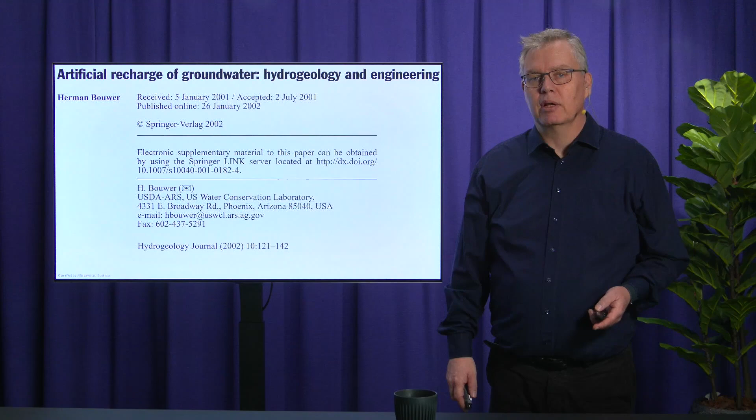My name is Alan, and in this video I would like to present a summary of the article Artificial Recharge of Groundwater, Hydrogeology and Engineering by Dutch scientist Herman Bouwer.

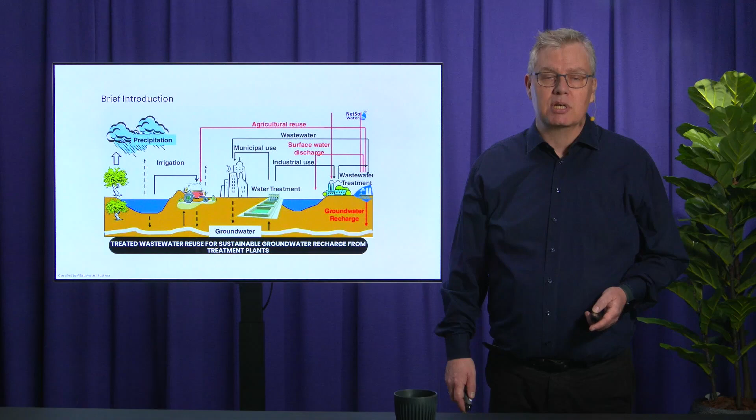Artificial recharge of groundwater means that we divert various sources of water to be stored in the ground. We may also assist the infiltration of water to reach the aquifer. Depending on local geology, we can use three types of recharge systems. Surface infiltration through typically large land areas.

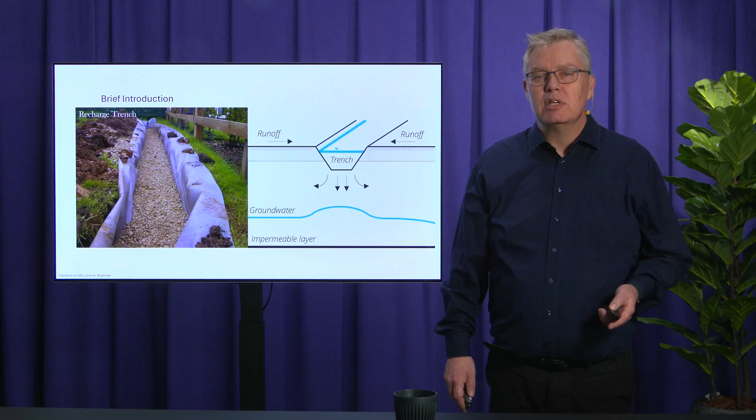Vadose zone infiltration through ditches or canals, which is a way of increasing infiltration surface area using less land area. These have a tendency to clog. And infiltration wells, also called injection wells. These are typically used where surface infiltration is low or there's a lack of available land surface. It may also be that aquifers are deep or confined.

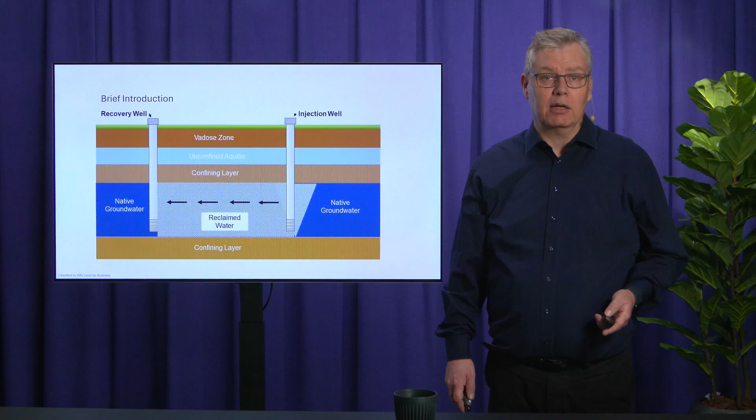Climate change increases the probability of extremes in weather, such as more frequent droughts and excessive rain. This means that artificial recharge is increasingly important because we can store water in periods of abundance for use in periods of scarcity.

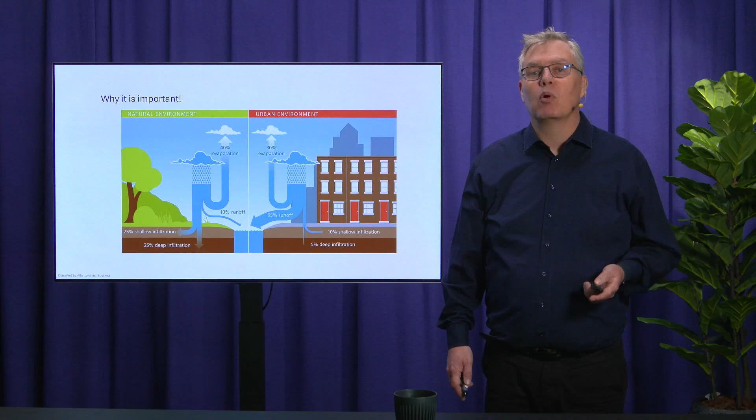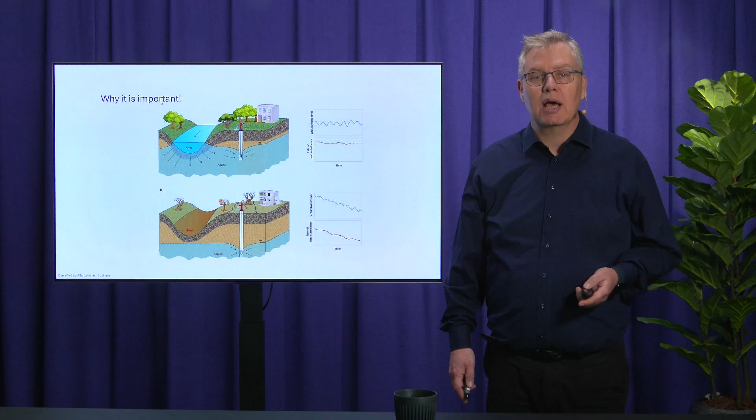Depending on local climate, specifically the amount of precipitation and evapotranspiration, urbanization may be seen as preventing water from reaching the ground or as a collector of water that can be diverted to artificial recharge. Other objectives of artificial recharge are to reduce seawater intrusion and land subsidence due to declining groundwater levels.

The traditional way of storing water has been with dams. However, good dam sites are becoming scarce. In addition, dams have various disadvantages such as evaporation losses, disturbing of waterways and wildlife, and increased risk of malaria and other diseases, none of which are an issue with underground recharge that has no open surface. Another obvious advantage is the volume that can be stored without taking up space above ground.

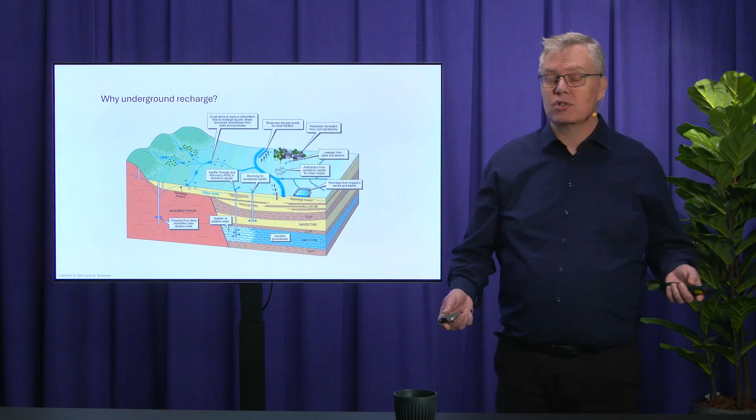Water sources for artificial recharge include water from perennial or intermittent streams, storm runoff, draining from fields, and sewage treatment plants. There's a widespread reluctance to drink water from treated sewage, and my personal favorite advantage of groundwater recharge is the ability to turn eau de toilette, not that one, this one, into spring water just by passing through a hole in the ground. It's almost like magic, or as it is also known, geopurification.

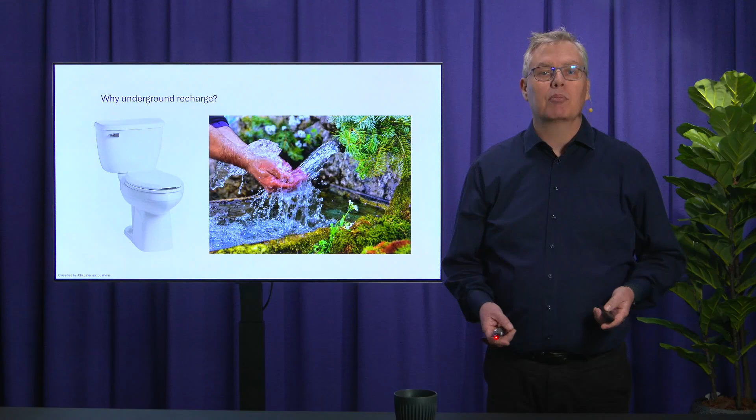As the water percolates through layers of soil, sand and gravel, pollutants and contaminants are filtered out, broken down by microorganisms and absorbed by the soil.

The paper aims to achieve a comprehensive overview of the design and management of artificial recharge of groundwater, including generally detailed descriptions. The objective is to enable readers to understand the key principles and practical considerations involved in designing and successfully managing artificial recharge of groundwater.

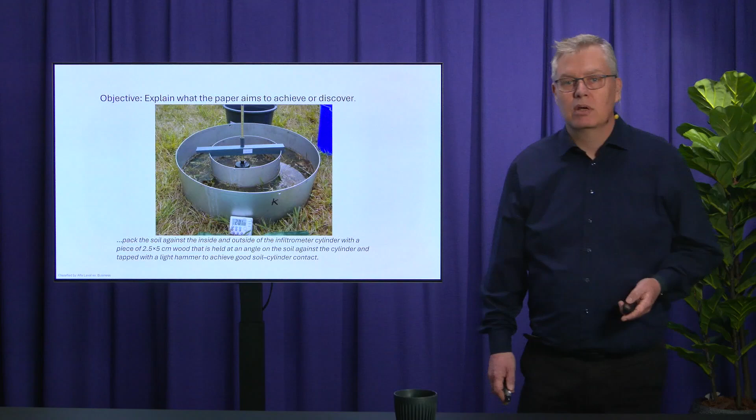The paper is very information dense, covering theoretical calculations as well as specific instructions such as how to pack the soil around the infiltrometer cylinder.

Whilst the report does not explicitly describe research methods or experiments, it does discuss considerations for designing and implementing artificial recharge systems. These factors include the permeability and hydraulic conductivity of the soil, which are crucial for determining the infiltration rate and the potential for clogging.

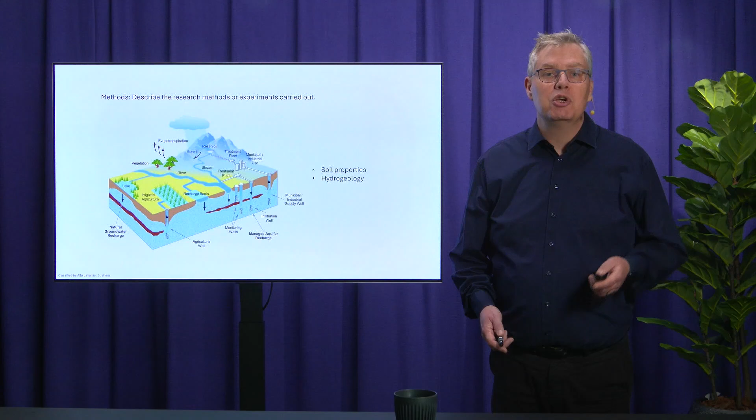The geological formations and groundwater flow patterns in the area need to be understood to ensure that the recharge water is directed towards the desired aquifer. Precipitation, temperature and evaporation rates can influence the recharge rate and the potential for water losses. The quality of the water being recharged needs to be assessed to ensure that it does not contaminate the groundwater.

The most emphasized topic of the paper is the quality of recharge water. There are two reasons for this. One reason is to reduce clogging of the infiltration surface. Clogging happens to all designs and will over time cause reduced infiltration rates, which should be considered in the calculations of the required surface area. All depending on the source of the recharge water, it may contain various pollutants picked up from paved areas, irrigation water, sewage, and many more sources.

There are three categories of clogging material. Solids suspended in the water, such as clay and silt particles. Precipitation of dissolved minerals, such as calcium, magnesium, and iron. Accumulation of algae and formation of biofilms.

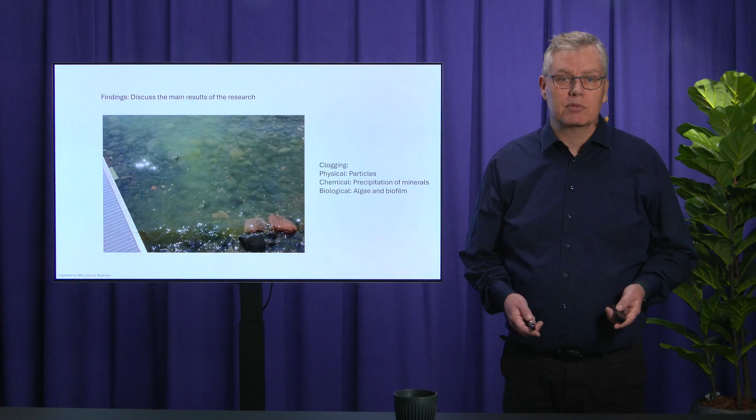The other reason is to protect the quality of the existing groundwater. Groundwater used for drinking is usually considered the highest quality and often pumped from sources where the water is from a time before pollution by industrialization.

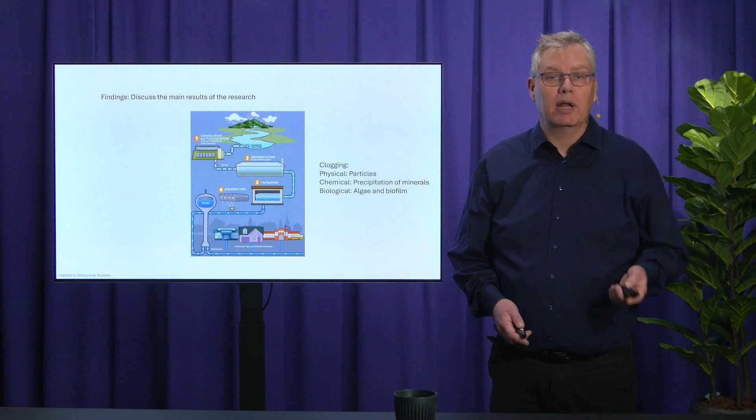In the US, the water used for well injection is usually treated to meet drinking water quality standards and is often chlorinated. Effluent for well injection should at least receive tertiary treatment to remove suspended solids, protozoa, and parasites by filtration. Bacteria and virus are removed by chlorination, UV irradiation, or other disinfection.

Another way to describe the findings of the report is to present the structure as a process with three main steps. Conceptualize the problem, that is, describe the situation and understand the volumes involved, where they come from, the water quality, and what should be done.

Find a solution. By use of soil maps and hydrogeological reports, promising sites can be selected and the textural classification can be evaluated in terms of hydraulic conductivity. Calculations can predict the volumetric infiltration rates, based on which wet infiltration tests should be performed by means of infiltrometers.

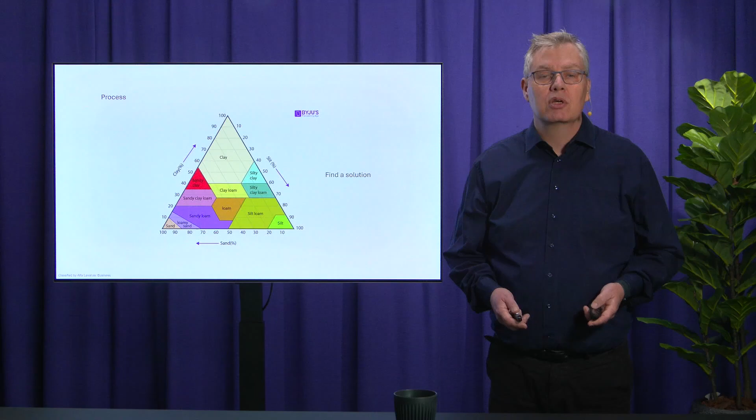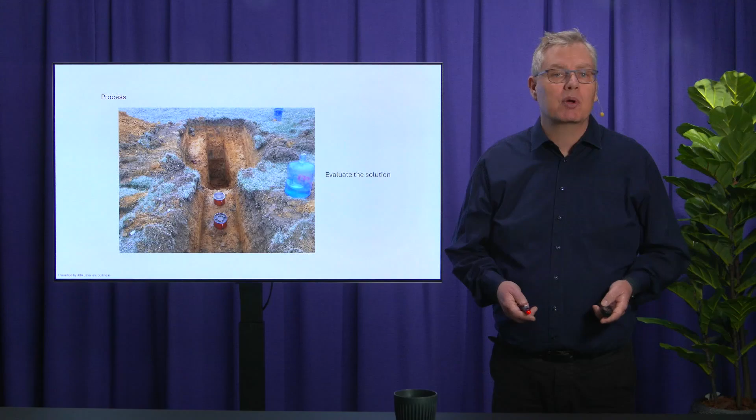Evaluate the solution before any major construction work is initiated. Especially in areas with large differences between winter and summer temperatures, viscosity effects alone cause winter infiltration rates to be as low as about half of those in summer, and there are so many variables that are hard to predict that the best way to get adequate design and management information for a full-scale project is by installing a few pilot basins of some 20 by 20 meters and operate them for at least a year.

The paper concludes that artificial recharge is a valuable tool for managing groundwater resources, particularly in areas with limited water supplies or where groundwater quality is declining. Successful implementation of artificial recharge systems requires careful consideration of factors such as soil properties, hydrogeology, climate conditions, and water quality.

The paper also emphasizes the importance of proper design, monitoring, and management of recharge systems to ensure their long-term effectiveness and to prevent potential negative impacts, such as clogging and groundwater contamination.

The implications of the report are significant, as it provides a comprehensive guide for policymakers, engineers, and water resource managers to understand the principles and practical considerations involved in designing and implementing artificial recharge projects. The paper can also be used to inform decision-making regarding water resource management and to develop sustainable water strategies.

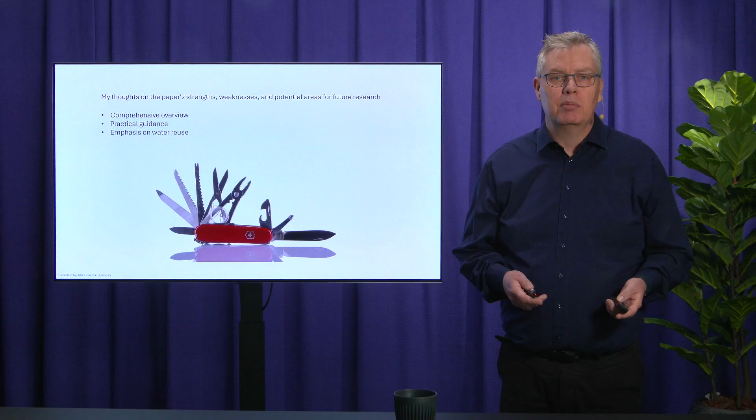The paper is a structured overview of important aspects to involve in the planning of artificial recharge of groundwater. And to me, as a student with a genuine interest in the subject, it was a great introduction. It's also what makes it difficult to pick the takeaways to present, because there are so many aspects to cover. The paper would have benefited from referencing a few case stories, indicating actual scope, such as the two mentioned here.

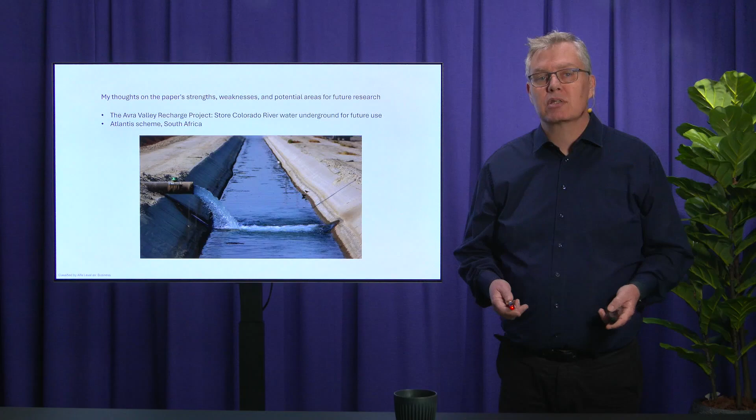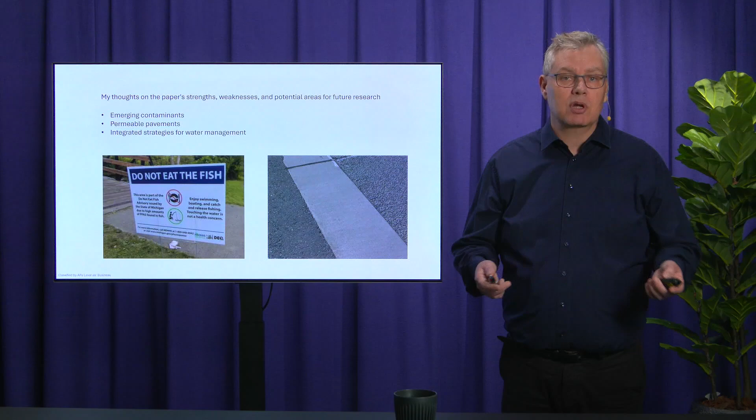Likely because the paper was written in 2002, there's no mention of the so-called forever chemicals, such as PFAS, and for the same reason, the use of artificial permeable surface materials is also not mentioned. Future research could investigate strategies for water management, considering such modern materials and the possibilities they provide.